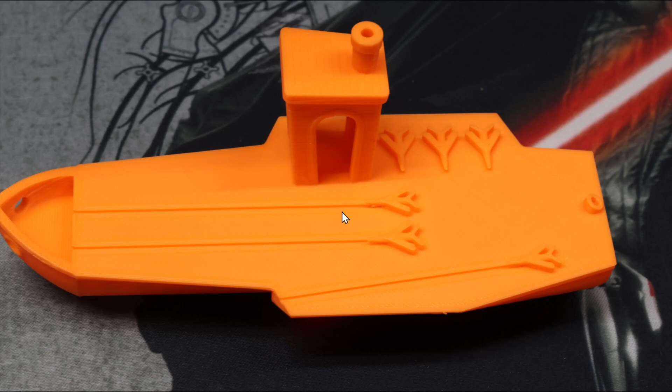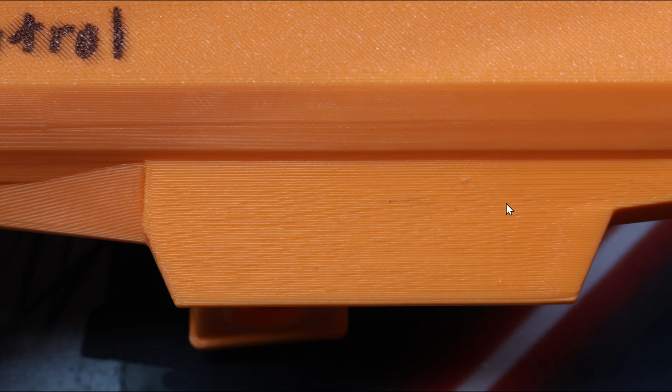All right, so let's get started with the control, and I printed out a Benchy with this eSun PLA Plus. It did come out pretty good. You'll see all of the overhangs, there was no stringing or anything like that, everything was really good, except it had one flaw. On the underside of each one of these places where it flared out, you can see there was a little bit of imperfection in there, we'll call it. So we'll see if after we get done tuning the filament, if we can take any of this out and smooth it out and get the consistent prints that we're after.

So let's get started. All right, the first thing we'll do is go into Orca Slicer, and let's go ahead and start on the orange filament here. The first thing we need to do is open this up and save it as a new filament. All we need to do is hit the little save button right there. Then we'll call this filament test, and we'll go ahead and save that.

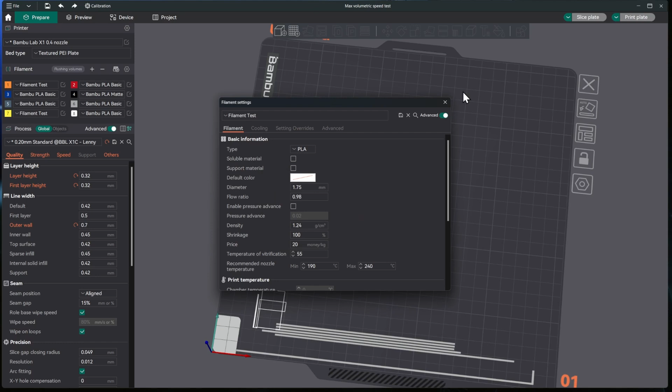All right, so the next thing we'll do is start the calibration. Just like we did before, we'll do several of the calibrations, except we're not going to do the temperature calibration, we'll leave that at 220. We will do the flow rate, and we will do the pressure advance. The reason I'm not doing the temperature is the temperature tower kept falling off of the PEI plate.

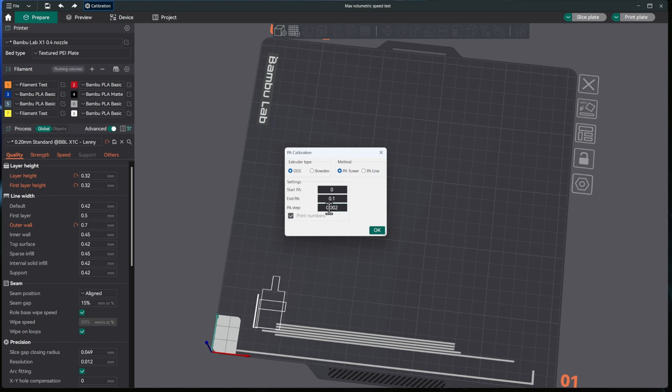So the first one we'll do is pressure advance. In my last video I did the PA line, in this video we're going to do the tower. I've watched several other videos and read several things, and I think the tower is really the way to go. The important thing to remember here is this PA step, or pressure advance step, 0.002. So what we're going to do is print this thing out, and look at all of the corners and look for where it's the most perfect. We're going to measure from the bottom up, and however many millimeters it is to where it's really, really good, we're going to measure by that step, that 0.002.

So we'll go ahead and slice this. And then whenever we hit print plate, let's make sure that we don't have flow calibration checked on here. I'm not going to do a time lapse of this one, but let's make sure that we don't do flow calibration from here on out.

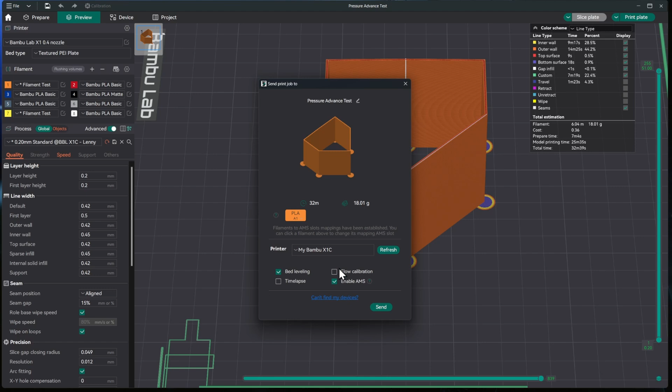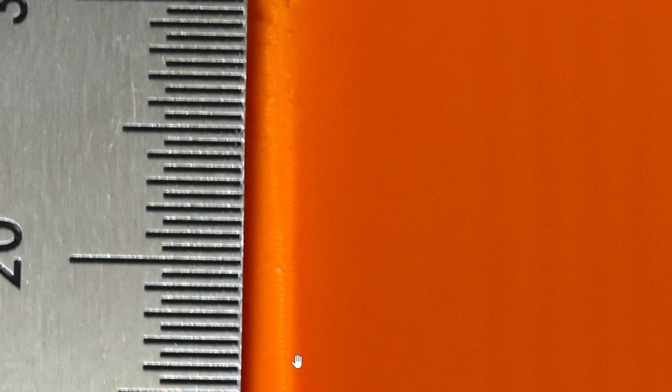All right, so as you can see here at the very bottom, it wasn't very good. We can zoom in there. And then at the very, very top, it wasn't good. And even here in the middle, you can see that it's stringing and there's some gaps and everything there. But where I think it looked the absolute best is just above 10, right here in this 10, 11, 12, 13 area. But that's what you're looking for on each of these.

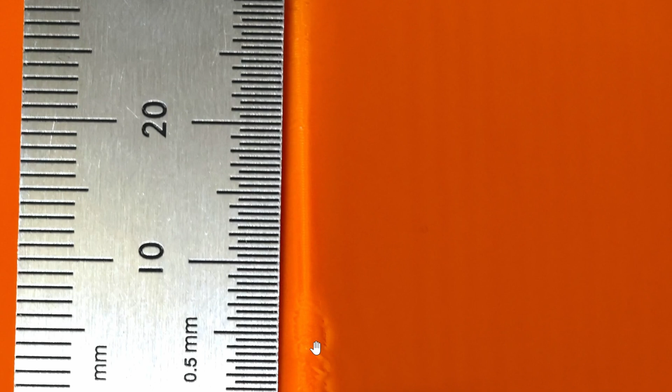And I will say taking a picture of all of this stuff and then being able to zoom in definitely helps out. That's probably the biggest trick that I can give you throughout this whole process. All right, so now that we're in here, we'll need to go back into our filament and update our pressure advance. So if we're going to use 11, we need to multiply 11 millimeters times the step, which was 0.002. So that comes out to 0.022.

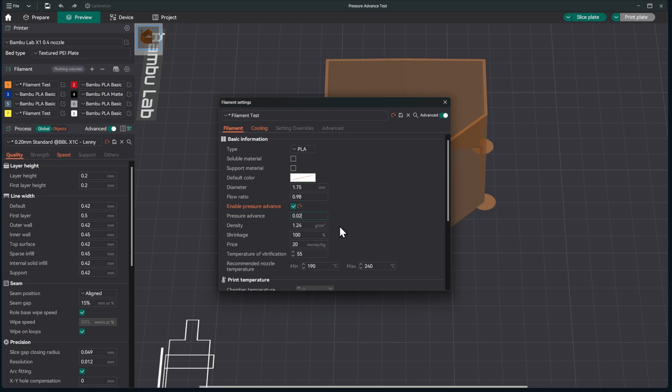All right, so on to the next test. We've done this test before, but this time let's dig a little bit deeper into what it's actually doing. So this 0 right here is where our flow rate is at right now. And this test is going to increment the extrusion by 5% all the way up to 20 and decrease it all the way by 20. To be honest with you, I don't see any filaments really needing this bottom row or this top row, and I think most of everything will be right here in the middle.

And again, the big trick with this one is once we've sliced it, once we print, again, no flow calibration. Once this prints out, take a picture of it and put it on something where you can zoom in and take a look at it. It'll make it a lot easier to see what we need to see. So let me get this printed out and I'll show you what we're looking for.

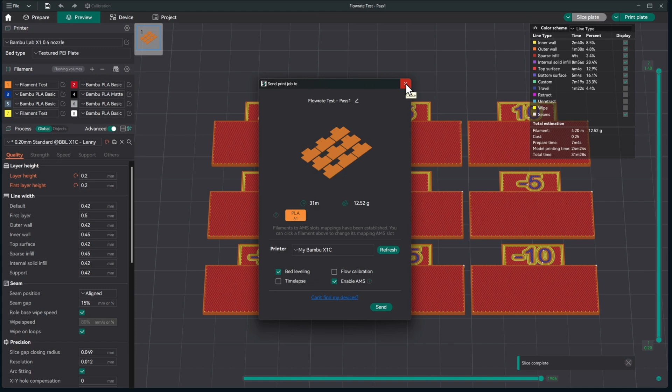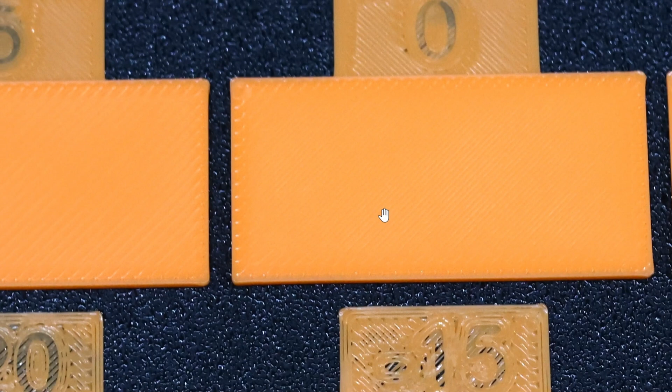All right, so here's what the print looks like. Here is where our flow is at right now. And like I was saying, these are the different ones. Whenever you print it out, you can really zoom in and take a look at these ridges right here. And you'll see that this is fairly flat. What we're looking for is which one of these squares is the flattest. And as we can see from here, the one in the middle is the flattest.

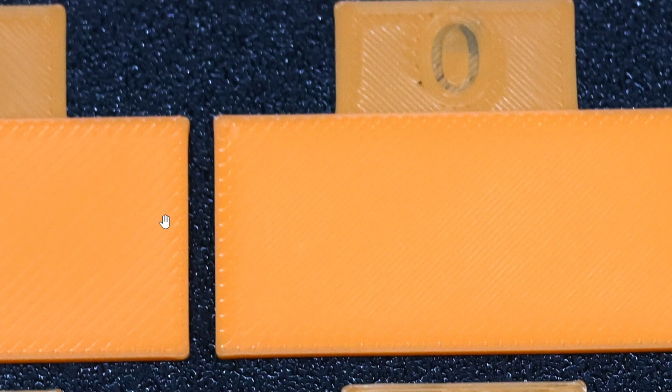You can definitely see the ridges on the bottom right there. The top is blurred out; we'll take a look at that in just a second. But from this angle right here, the 0 is the smoothest one. If you're caught between two of them, go with the higher number because the second test will let you bring it back down. And just to zoom in on the top ones there to show you, you can really see the ridges. There.

All right, with that test done, we would update something here if we needed to, but since it was 0, we don't need to update it. But that doesn't mean that we're done. We need to go to the second one because that will fine tune it. The first flow rate test did everything by 5% at a time. The second flow rate test does everything by 1% at a time. So you can see it starts with 0 and it starts counting backwards. And that's why I said before, do the higher number if you're caught between two. So this one will let you come back down.

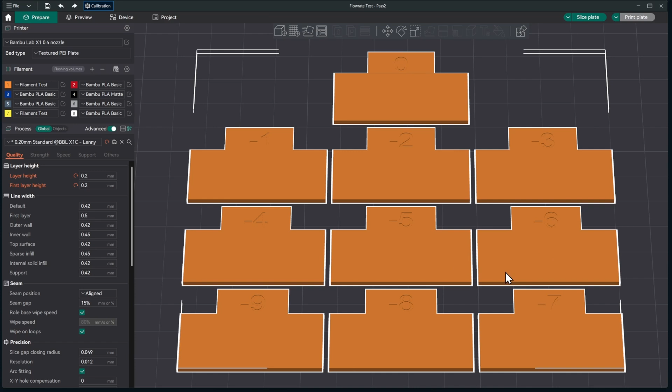Again, when you're done with this one, take a picture of it so you can zoom in. And we'll go ahead and slice it. And again, when you print the plate, do not select flow calibration. So I'll go ahead and print this and I'll show you what it looks like. Okay, so as you can see here, we'll take a look at the 0 and the ridges on it. We're doing the same thing. We're going to zoom in and look at all of the ridges.

And from this view, -1 between these three looks like it's the smoothest. This one has a couple of ridges. On this one, the ridges are not as pronounced. Let's take a look at the other ones. And as you can see, big ridges in all of the other ones. So -1 it is. So let me show you the math on what we need to do with the modifier, which is what these numbers are called.

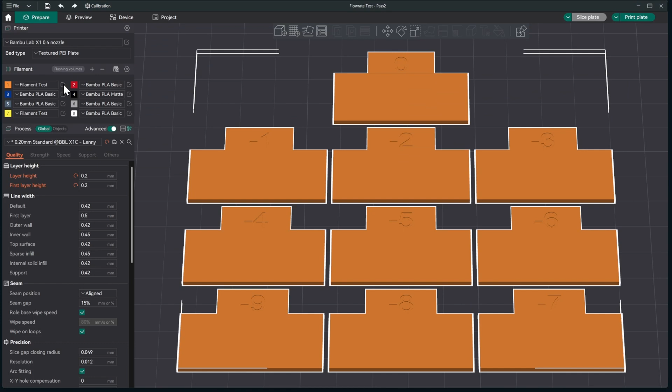And then the last test that we'll do actually doesn't have any documentation, but it is something that we've talked about on the channel before, and that's the max volumetric speed. So if everybody remembers, you've heard me talk about this max volumetric speed down here at the bottom. And you'll see that on the generic, it sets it at 12 millimeters cubed per second, and on the Bambu it's on 21, and even on some of them it's 22.

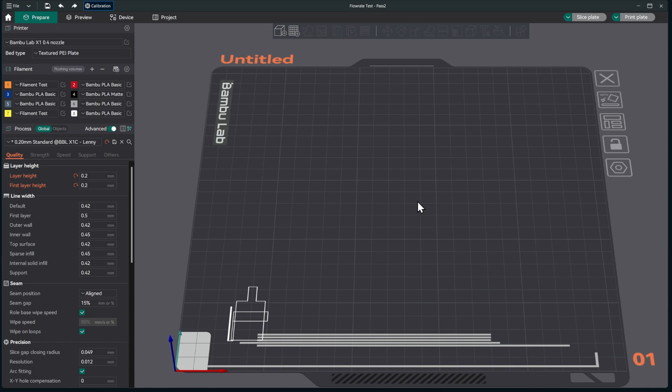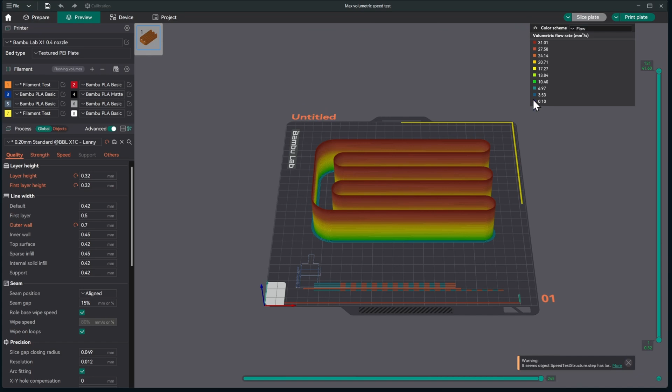So there is a test that we can do to see what the max volumetric speed is for our filament. So we'll go ahead and go into calibration and hit more and hit the max flow rate. And I usually do this from 10 to 30 with a step of 0.5. So once we slice the plate, if you hit flow right here, you'll see these different colors correspond to the different max flow rates that it'll be doing as it's going around this.

So what we'll be looking for is the point at which it fails, and right below the point at which it fails will tell us the max volume that we can run in the filament. So I'll go ahead and get this printed out, and again, I will not be using the flow calibration to do that. I'll print it out and let me show you what it looks like.

So as you can see here towards the top of the print here, it did start to fail up into the 20s in the max flow rate there. And you can see that it started to warp even a lot below there. And you can see that it warped at the top of all of the twists and the turns there.

So I'm going to go with the pretty conservative value, and that's what I've seen other people go with. I don't think I'm going to go up into the 20s with the Bambu filament, but I think 15 is a pretty conservative number to go with. We'll do a high quality print and not a chance of warping or failing. So let's go ahead and get that entered.

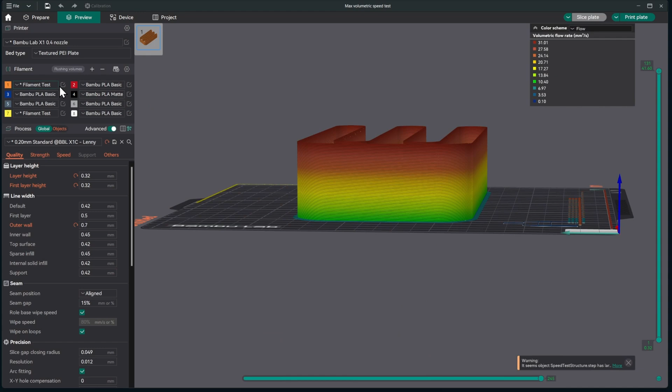All right, so now that we're back in Orca, we'll go in here and you'll notice it changed it to 200. So we'll definitely need to change that. So we'll drop it back down to 15. Make sure you hit the save button on that one. And that's all of the tuning that I think that we'll need to make a significant difference on that Benchy that we did. It was pretty close, but we saw that there were some errors on the underside. So let's print out another Benchy and see what it looks like.

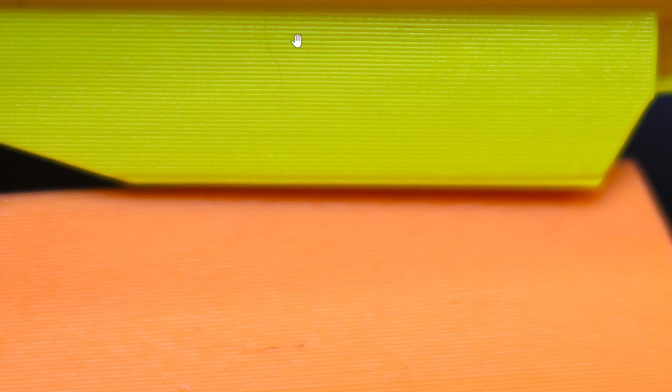All right, so here's the yellow up to the control, and as you can see, wow, just really, really good. No artifacting. There's still some ridges there, but for the underside, that looks really, really good. I was trying to get any angle, but the camera would not pick up anything, and it felt really, really smooth there, especially on this side. But as you can see, really, really smooth. So we did have a really good result from the tuning.